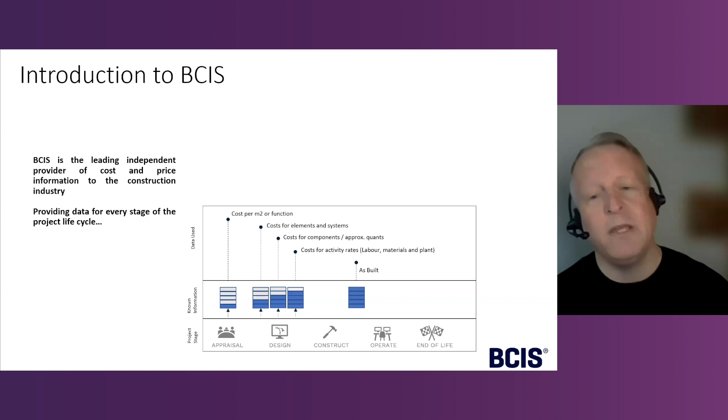It's only once a project has been through the construction phase that obviously we understand the full makeup of all of the components and the materials that have gone into it. And likewise, after we've actually run that building for a number of years, it's only then that we truly understand all of the maintenance and replacements and all of those in-use activities to keep the building going over its life. So really, in a nutshell, BCIS is designed to supply information to either improve estimating accuracy or to facilitate benchmarking, to make sure that the design team can demonstrate that you're getting value for money with the construction projects and the specifications that you're making.

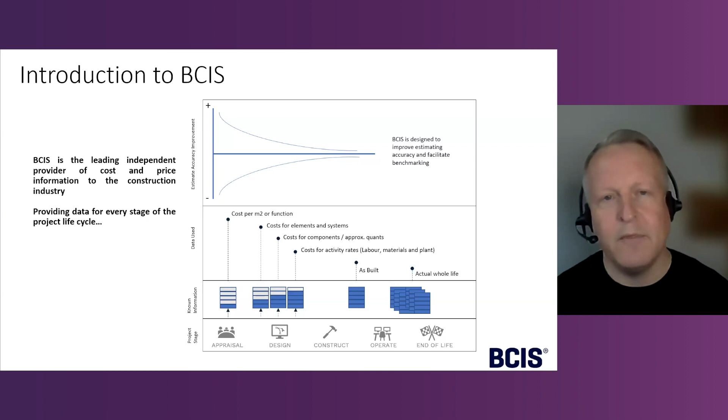So just a brief slide on BCIS there. What I'm really here to talk about today is around climate change, and what is undoubtedly the greatest battle and the greatest challenge of our time that we're currently going through at the moment.

I'm not going to jump straight into a rant about this, but we're just going to focus on one key measure, which is that around 40% of global greenhouse gas emissions come from the built environment. That's not just the construction, but obviously the operation of those assets as well. If those are left unchecked, i.e. we don't do anything about it, they're predicted to double by 2050, which is incredibly scary.

So I'm presenting today from Norfolk, and walking around Norfolk at the moment, there's quite a bit of floods going on. Walking around almost in my waders here in Norfolk. The effects of climate change are happening now. We are witnessing this, and unfortunately, it's our sector that's predominantly responsible for those greenhouse gas emissions that are being generated, and we need to do something about it.

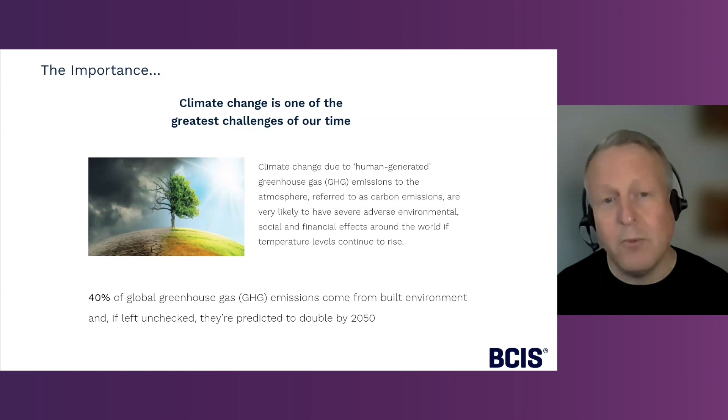So, as a construction professional, it's our duty to the planet to reduce those impacts. Every single construction professional, everyone joining this webinar today has an ethical duty to the planet and its inhabitants to do something about it. The scary statement is that in the future we can't reverse the decisions that we're making today. We have one opportunity of getting in and reducing the emissions caused by the activities that we do.

So we need to make sure we're making the right decisions, and that's really what this webinar is about today, making sure that we're armed with the correct data, information, knowledge to be able to drive down the effects of what we're doing from construction projects.

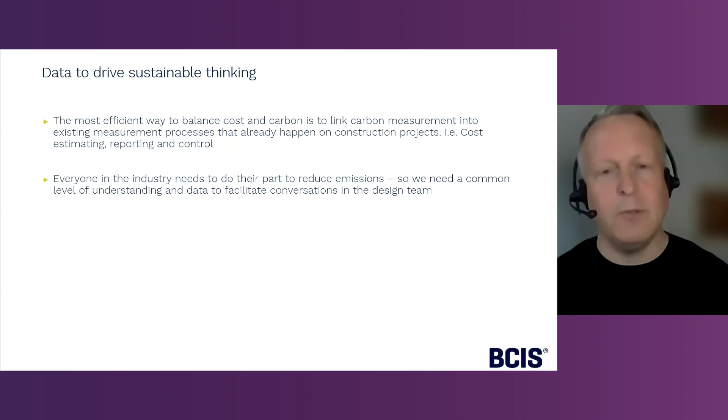So in order to drive down our carbon impacts, we need to avoid the garbage in, garbage out scenario that unfortunately happens quite a lot at the moment when it comes down to carbon accounting. So if you ask 5 different carbon accountants to measure the carbon impact of the same building, chances are you're going to get 5 different answers out at the moment. And a lot of that's driven by methodology, but the main driver is all about data.

We don't have a rich history of carbon data to draw upon, and that means that people are pulling whatever data that they possibly can, right or wrong, in order to try and do their best to decarbonize. And we need to improve all of that if we're going to get to this place where we are having the proper, correct impacts to reduce our carbon emissions.

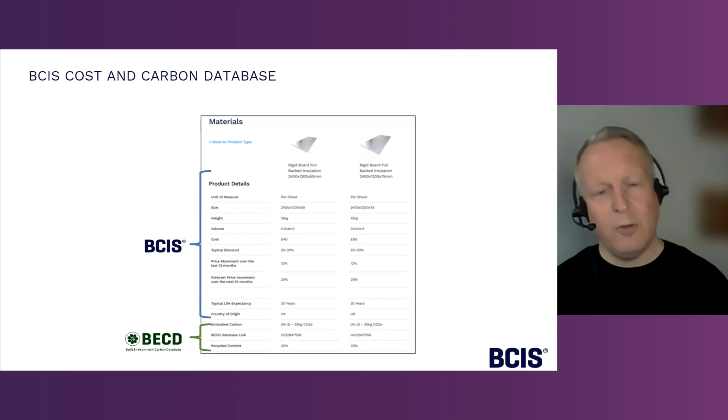The idea is that you can understand the cost, the past and forecast inflation, and other bits of information that could be useful in specifying and selecting options for materials. That data rolls up into a component lifecycle costing database.

We have a big library of building components, Lego blocks of your construction project, and for each component we have a series of data points. So if we take the example of ceramic floor tiling, there's a number of activities that happen on that tile over the life of the construction project.

The first activity is to put it down and install it for the first time. But then there's maintenance activities that happen every X number of years, and replacement activities when the tile needs to be picked up, stripped out, disposed of, and a new floor finish put back down again.

Within our component database, we have all of the activities modeled for what happens to a component over its life, and each of those activities is built up from labor, materials and plant data. So the materials database is one of those bits, but there's also labor - they're all quantified activities that roll up eventually into our components library.

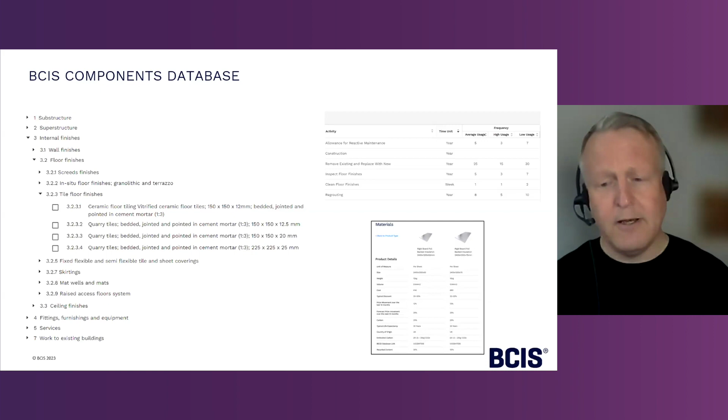That data feeds into two things. We're absolutely delighted that we've been able to provide that data into NBS Chorus, which we'll be talking about shortly. This lifecycle costing component library provided in Chorus has been developed to facilitate discussions between the design teams. Within NBS Chorus, they're indicative values.

We try to make them real rather than just having one meter squared or one number or one linear meter of each thing. We've developed a generic model of a three-story new build office building, and the idea is that the quantities you're seeing on NBS Chorus are applicable to that type of building.

The idea is that you should be able to look at those components - it's relatively high level data, but it shows you the cost, the ongoing maintenance and replacement activities, and the total in terms of cost. And then it also provides the same information when it comes down to embodied carbon.

So what is the construction carbon? What's the ongoing maintenance and replacements that are needed on that component over its typical life? And again, what's the total carbon emissions?

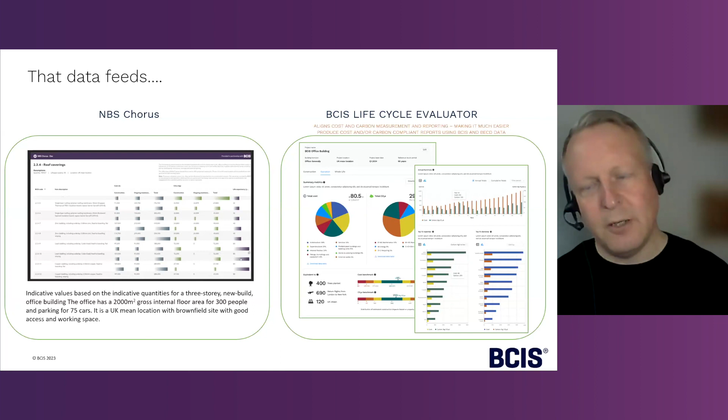So with regard to the data that pumps into NBS Chorus, they are indicative values, designed to facilitate conversations in the way that I've spoken about. The numbers will vary dramatically based on all sorts of things. We've provided data within NBS based on a generic office building in a particular location with a particular set of specifications.

They will change quite rapidly if you start to specify tiles from Italy or something like that - the carbon numbers will obviously change quite significantly. The other thing that will have a massive impact is how long you run your analysis for. We've picked an industry standard 60 years for the data provided within Chorus, and that will also change the whole life cost and carbon numbers depending on how many years you want to operate your building for.

The final note is that you can't add up the numbers and expect to come up with a compliant carbon assessment. If anybody's seen the carbon assessment standard methodology from RICS, it's quite a complex 200-page plus document with lots of things you need to consider. So again, the idea of this data is to facilitate discussions and collectively drive down carbon emissions. Stephen, if I can hand back to you, hopefully that made some sense.

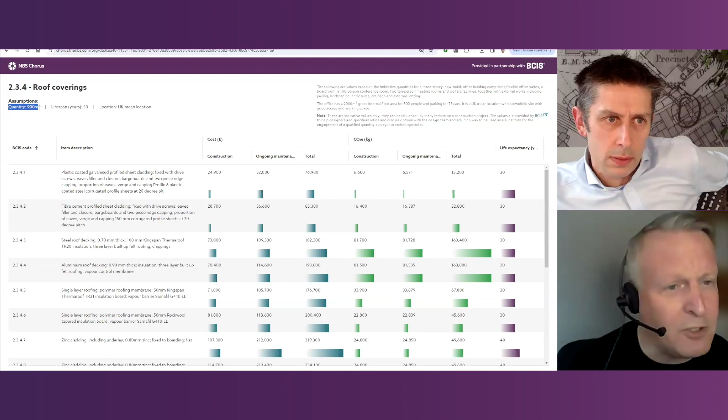Yeah, absolutely. So rather than try and present information for 1 meter squared of lots of different options, what we've done together, Stephen, to make it more meaningful, is create a generic archetype model. The values you see on screen are applicable quantities, which you can see in the top left - a quantity of 900 meters squared, which is the typical quantity for our 3-story new build office building, as shown in the top right. So it gives some context in terms of the typical areas.

You just highlighted 2,000 meters squared, which is our gross internal floor area, designed for 300 people, 75 cars, based on a UK mean location, brownfield site, but with good access and working space. So we've got indicative quantities and therefore values that come out from the BCIS database that I ran through earlier for that type of building.

The lifespan is 50 years as opposed to 60, which I said in my slides earlier, Stephen. So changing the lifespan will obviously ultimately change these numbers. And the location is UK mean, which doesn't make a huge difference in terms of carbon numbers, but the costs significantly change regionally, of course. So yeah, they're designed to be indicative values to help those discussions.

So through this system, you'll be able to see what's predominantly one of the main drivers for our client - well, they want a low carbon building, they're interested in the whole life carbon numbers for the reasons we talked about. So within this system, you can sort that data to get to... there we go, that's beautifully demonstrated by you there, Stephen. So you can sort on the things that are most important, whether it's cost, whole life cost, ongoing maintenance, or totals of those things. And the idea is that can then facilitate a discussion.

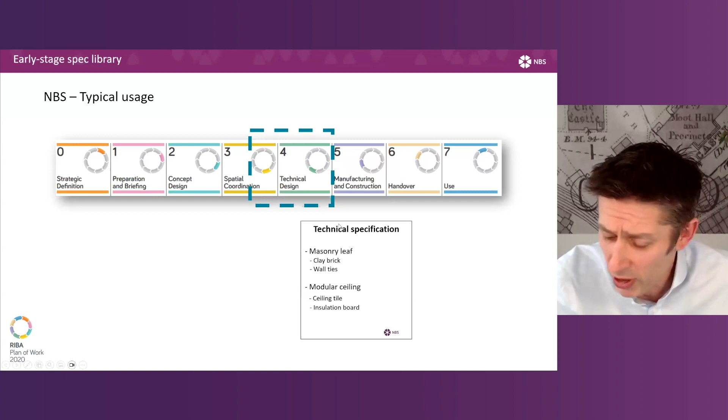Traditionally, NBS is used in a project to write the technical specification that defines the quality prior to construction. You may specify things like a masonry leaf or a modular ceiling. What we're trying to do with the early stage specification is allow that specification process to start much earlier in the project. So before you know whether there's going to be masonry leaves or modular ceilings, specify the overall requirements and capture the client brief at the concept design stage.

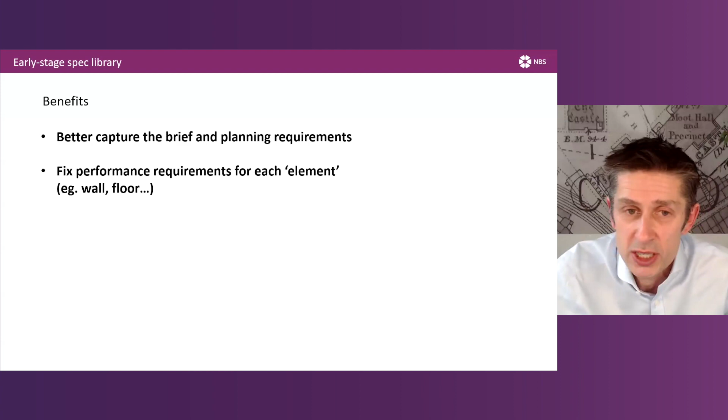So produce, in RIBA Plan of Work terminology, at the end of concept design, a tight outline specification that can then develop into the technical spec. So not a masonry leaf, but a wall in terms of its fire, thermal, sustainability, technical characteristics. That's the concept. That will give the benefits of a better document, capture the client's brief and shape things up nicely for conversations with the planning authority. At the start of the golden thread, an overused term, to have those fixed performance requirements for each element in the building: walls, floors, roofs, etc.

And to allow for communication and collaboration. So client with architect with building services, structure, cost consultants, because at this early stage is where the biggest influence on those decisions can be made.

And that's the ideal route, that outline specification as defined in the RIBA Plan of Work 2020, is that ideal route into the technical specification development. And that's, as I mentioned, that fixed set of requirements that you can verify the final decisions against and assess change requests as they undoubtedly come on a project.

So imagine a concept design here. It's our NBS restaurant model that we use quite often. You've understood the client requirements, done the basic concept design, and you're thinking about what activities will happen in the building, what spaces are needed to support those activities of things like cooking and eating and washrooms, etc. And then for the right environment in each space, you're going to be breaking down that building in terms of its major elements before you make any real detailed technical decisions.

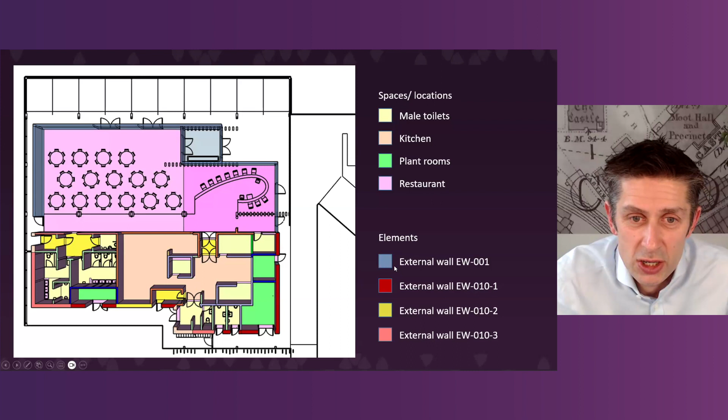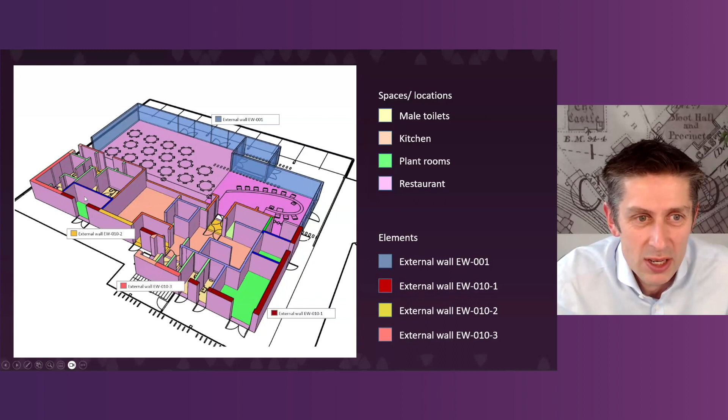So we can see around the building envelope here, we've got different types of elements, external wall 1, 2, 3, etc. And you have an idea that some may be more glazed wall and others will be solid walls made up of different systems, etc. But no absolutely solid decisions yet made.

So if we look at the principles behind this, you've got an element that could be made of many things. The things that are fixed are the performance requirements. You might have a budget, almost certainly in terms of cost and increasingly in terms of carbon. But there's still lots of different ways those performance requirements could be met. So with masonry frame or steel frame or timber frame, etc., of different width and strength and performance.

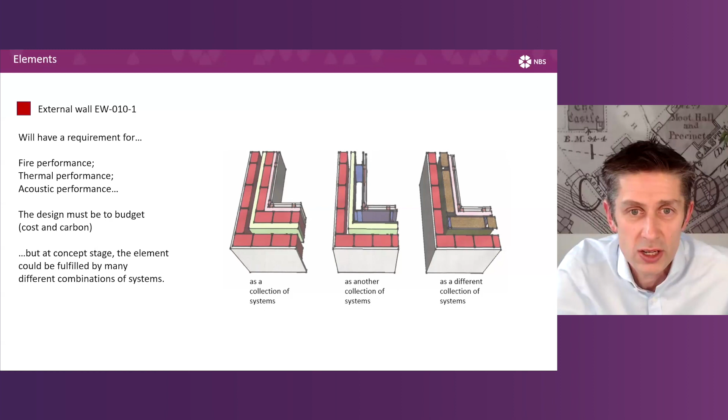In addition to thinking of the technical performance, working with BCIS, you can get an indication of what those financial costs are, what the embodied carbon costs are, plus also the operational costs as well. So you can make those decisions with your eyes open. You can have those conversations with the cost consultant, understanding that one's going to be twice as expensive as the other, or 60% larger in terms of embodied carbon.

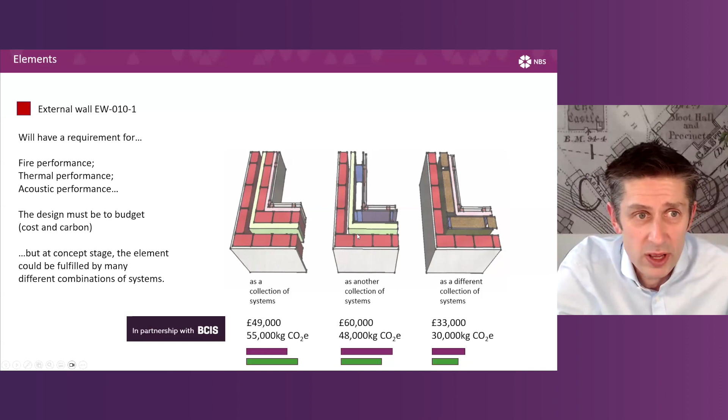So let's just look how a specification would develop for something like a wall using Uniclass for this example, but it could quite easily be the section that we've got for common arrangement work sections, which is B60. The principles are the same. Software functionality is slightly better for Uniclass because you can have the link and the cascade of items from element to system to product.

But in NBS, at a very early stage, you might just capture the functional requirements, the brief for a particular wall. So think of that concept design earlier, the external wall to the back of house. You said this is going to be type 10, and you're just capturing some of those initial decisions.

Next stage as you move through the project is to say that these are the functional requirements, and they will be met by providing a wall of the following fixed elemental performance in terms of things like U values, fire performance, durability performance, water penetration, what have you. And just like all good NBS principles, specifying a technical value with the correct units and citing the right standard.

And then in conversation with the cost consultants, maybe referencing the BCIS code, you could put some of the assumptions that you think are going to be in there in terms of cost and carbon that helps work towards budget. And then the project progresses further, and this is where the performance can be provided by a number of systems that come together. So something like rain screen or masonry leaf with internal wall tie in the middle. And these decisions can always be cross-checked back to that fixed performance.

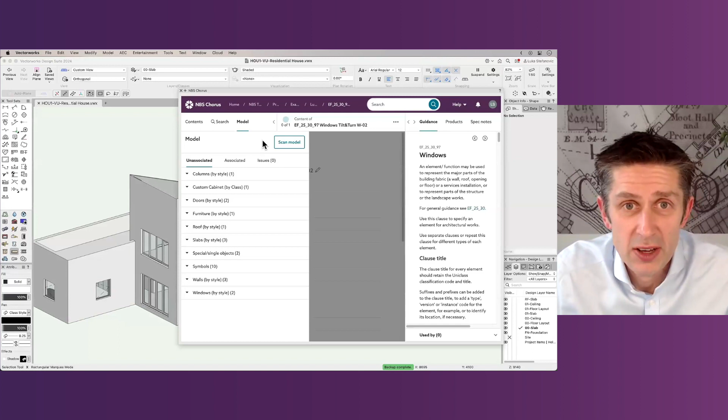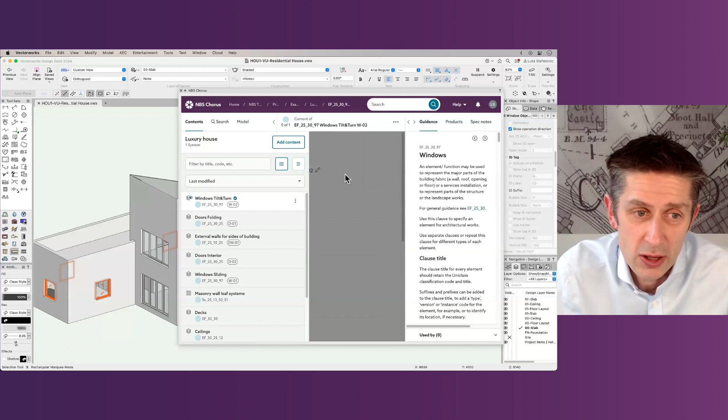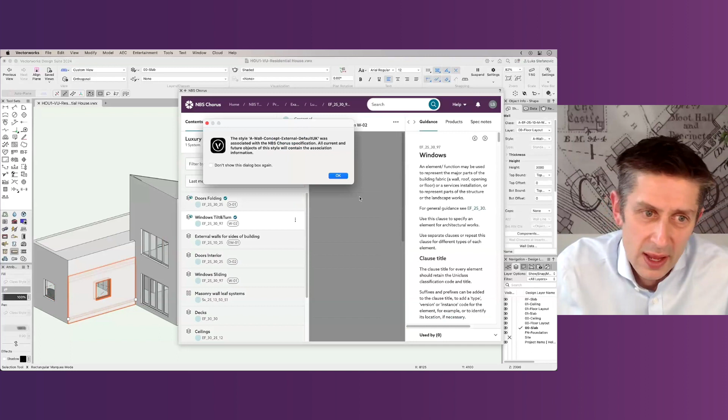We've got concept design on the screen just to start linking up the sort of key elements of the building. So you're seeing associations being made to the window type in the 3D model there with the specification from NBS. So it's scanning the whole model, finding all instances of a particular door type and associating that with the door element that's in your outline spec. So we've done windows, we've done doors, and what we're doing now is just linking that entire wall element to the external walls element clause in NBS.

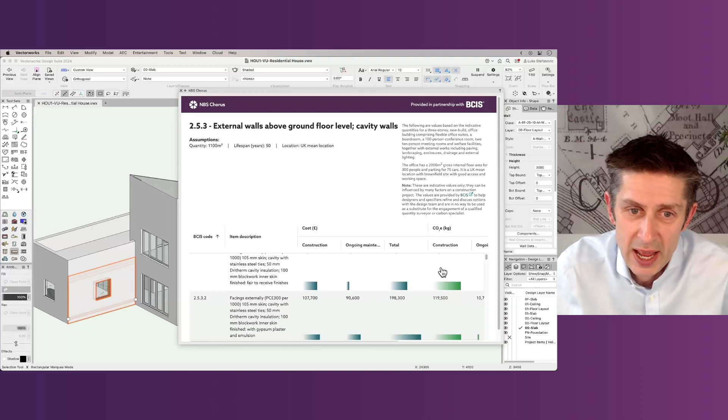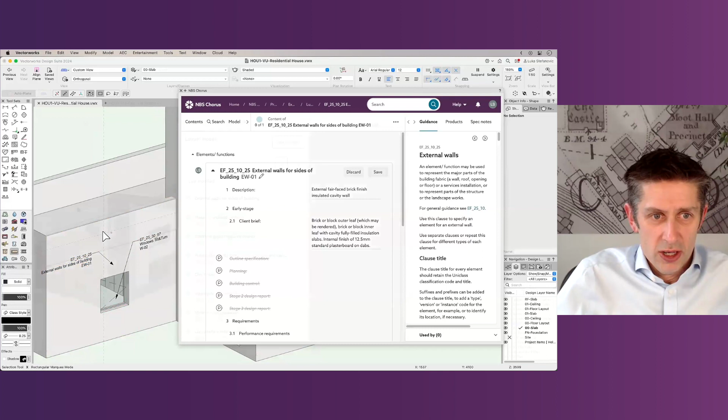And you can have the NBS window open. It's exactly the same content. You log on the same in that design environment. So you've got the concept design in Vectorworks, and you've got all that fantastic information from NBS BCIS at the fingertips of the designer. So you can capture the brief, you can put the performance requirements in, you can look at the BCIS data there and put some of your assumptions in against that particular wall based on where you think it's at in terms of those early decisions, or what are the fundamental materials.

And then jumping forward, you now see the model's no longer just that white model from the concept design, but it's developed up into a full technical design. The specification in parallel is now looking at systems and products.

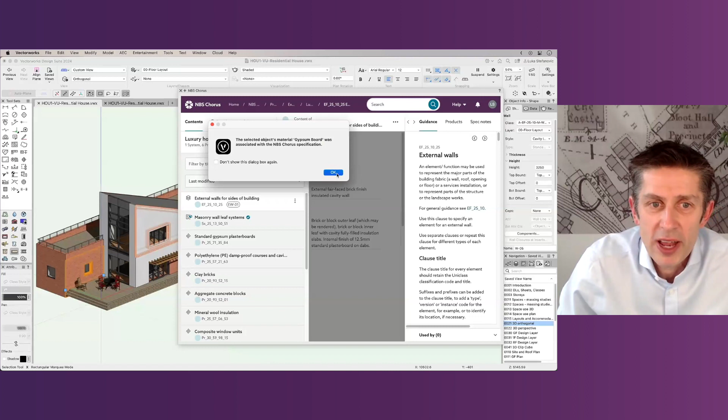We're getting down to masonry wall leaves. You've got gypsum plasterboard, clay bricks, aggregate blocks, and the links can be made at that material level. So just create a little link here between the damp-proof course in the model with the damp-proof course in the specification. Next one we do, there's clay bricks, just looking at the material layer in Vectorworks, linking that to the clause in NBS, doing the same there with the concrete blocks as well.

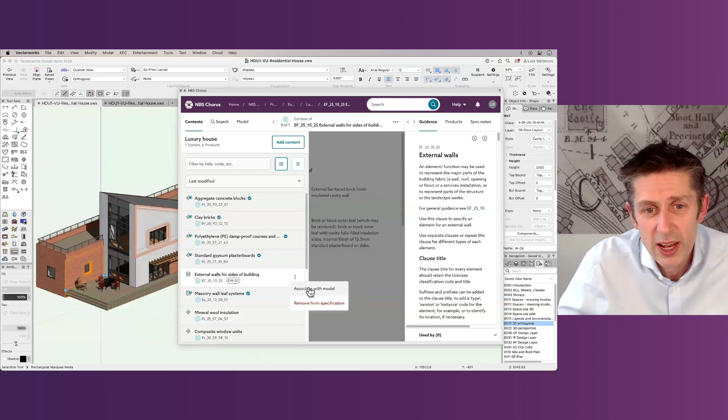So at early stage, you're doing the links between that sort of large chunky element and the elemental clause. But now at the technical design stage, we're down to the level of things like insulation, clay bricks, concrete blocks. And that little model report in NBS is querying that Vectorworks database to show all of the objects that are either unassociated yet or associated in that 3D model. The little purple chips there showing what has been linked.

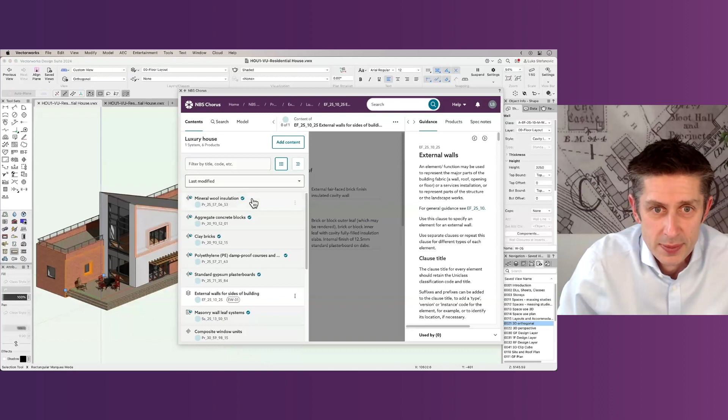If we look at something like mineral wool insulation, what we're going to do is make the specification choices here in the NBS plugin for Vectorworks. Now quickly filter to show the insulation from the manufacturer Knauf, and I've clicked the button add to spec, and we've got all the technical properties from the Knauf Insulation DriTherm cavity slab being dropped into the specification.

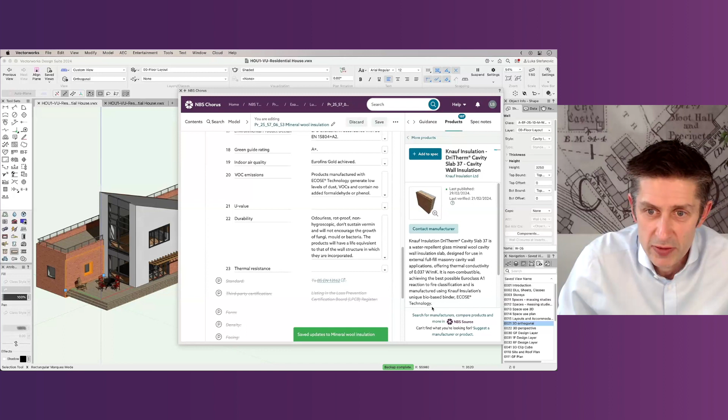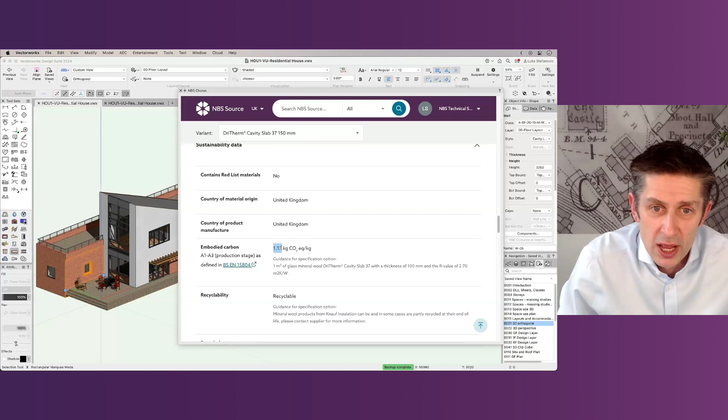And if we jump across to the wider screen on NBS Source, you can see you get an extended amount of technical information. Just scanning down the page here, there's guidance on suitability, third-party certification, same technical characteristics there. We have this little sustainability data card further down the page, and you can see that the EPD for Knauf insulation here has 1.13 kilograms of carbon equivalent per kilogram.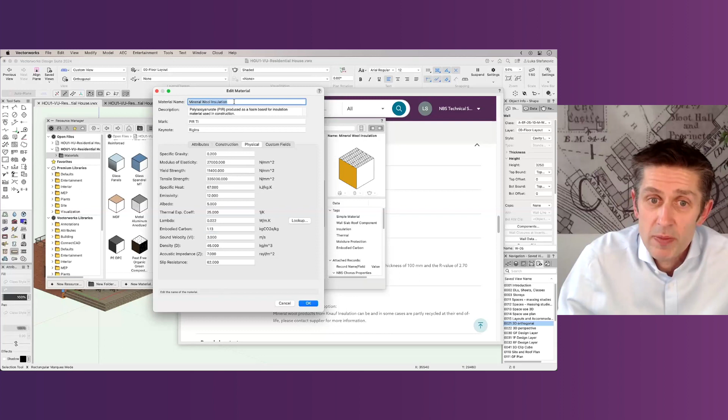So we're going to jump to that same material now in Vectorworks. Fortunately, this is the same units. This is per kilogram, you can see on the screen here. If it's not, like based on what James was saying earlier, you'd have a bit of maths to do. If that was per meter squared, you'd work out the density. But that's been put in like for like units.

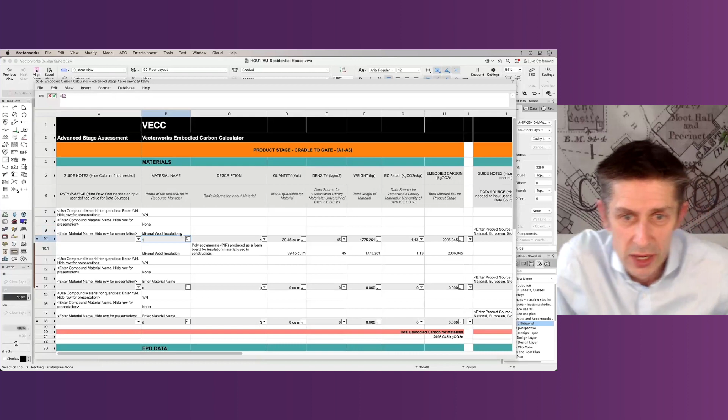And you've just seen here how you can use some of the great information we have in NBS in other tools. So we're going to the sort of embodied carbon calculator in Vectorworks. Going to the particular material name here, mineral wool insulation. And as that's put in, you see row 10.1 has been populated in terms of quantities and the values there. So two great tools coming together. Got the modeling tool from Vectorworks in 3D with all the relations and the specification, content and guidance from NBS.